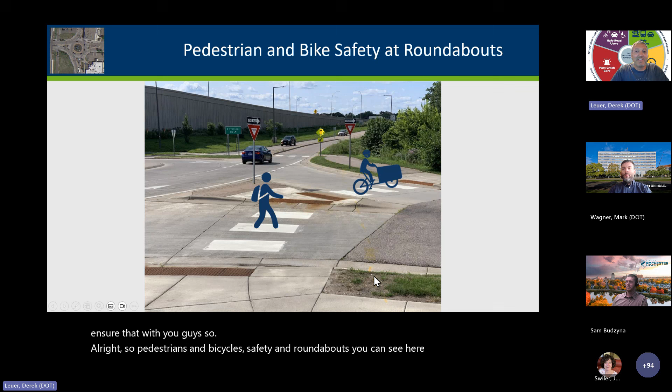So it is one of the bigger questions we get. We've looked at this a few different times in a few different ways, and I'm going to go over some of the results of what we found and share that with you guys. So, pedestrians and bicycle safety at roundabouts - you can see here we got a little cartoon going across the roundabout, and a bicyclist as well.

So just a little bit of history. This has been kind of a question that's been out there for a while. Without a significant number of roundabouts in locations where people walk, this was kind of a hard question to answer with crash data alone.

Back in 2012, there was a study conducted by the University of Minnesota that was purely observational. What they did was take what's called a fisheye camera and place it in the center of roundabouts at two different locations. They focused on how pedestrians and bicyclists are using the roundabout, and how drivers are yielding to those people as they walk into the roundabout and across those legs - are people yielding, are drivers slowing for those pedestrians.

The starting location of crossing affects driver yielding. That was one big finding - where that pedestrian was starting as the vehicle was approaching was really important. Another thing they found was that as vehicles exited the roundabout, those yielding rates were actually lower than when drivers were entering the roundabout.

But overall, what they found was there was actually really good compliance for drivers to pedestrians in roundabouts - probably much better than at typical through-stop intersections or even at signals sometimes. So what they found was fairly good compliance, and drivers entering the roundabout were actually tending to go fairly slow, especially compared to other intersection approach types.

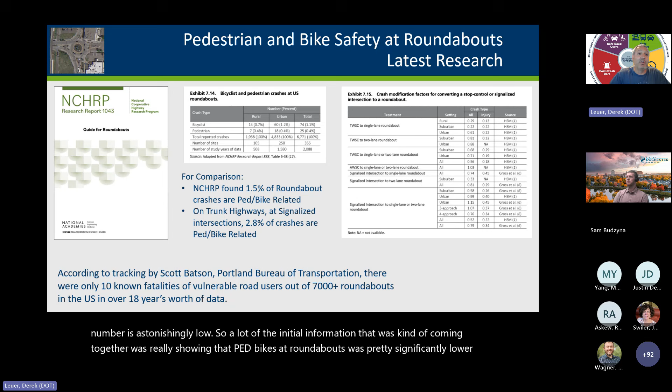We couldn't find any multi-vehicle fatal crashes. This report, though, really just looked at the vehicular crashes, because that's where we had the bulk of the data.

And we did look at the ped bike stuff, we just didn't really highlight it. I'll take a little blame here — I kind of fat-fingered a few of the numbers in there, and it didn't look real promising. But when we looked back and vetted that information a little bit more, it looked promising.

Shortly after that, we did an addendum where we looked at 100 more roundabouts, along with 100 control sites, and looked at pedestrian and bike crash rates and density alone. What we found, comparing those roundabouts to other traffic control types, was 64% lower crashes for pedestrians, both by density and by rate.

So it was a pretty substantial reduction. Bicyclists, we didn't see quite the same reduction, but we still saw a healthy one — between 10 and 20%. If you average it out, we had about a 16% reduction for bicyclists as well at roundabouts versus other traffic control types. So right off the bat, it looked really good.

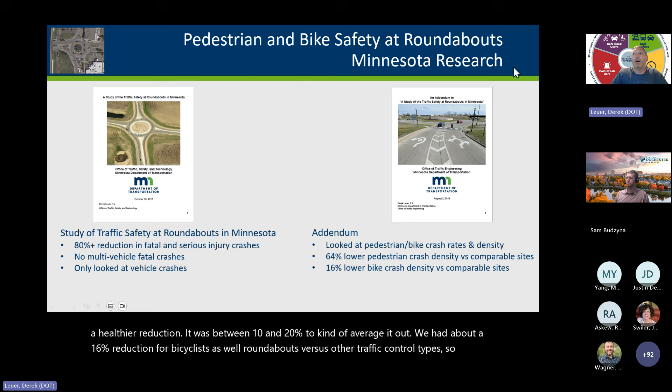Those numbers were very promising. We really try to boast those numbers — it's one of the first things we share when people ask how roundabouts compare to other traffic control types. Roundabouts work extraordinarily well for pedestrians and bicyclists.

We did another study in 2022 about user experiences at roundabouts, trying to gather more of that qualitative feel of how people feel about it, rather than just quantitative data. We looked at observational case studies across 8 different locations.

We really focused on that pedestrian user by measuring how drivers behave towards pedestrians, what pedestrian behavior looks like at the crossings, and what the pedestrian infrastructure leading up to and at roundabouts looks like, and how that impacts how people feel about it.

One of the things we found in that study was that RRFBs — rapid rectangular flashing beacons — at roundabouts do increase yielding rates. In-road signs work satisfactorily as well, though not as well as the RRFB.

Another big finding was that people walking much prefer single-lane roundabouts over multi-lane ones for crossing. That's probably somewhat intuitive — fewer lanes are easier to navigate than multi-lane roundabouts, which can be much more complex. This document also developed guidance for practitioners on things to consider when designing pedestrian facilities at roundabouts.

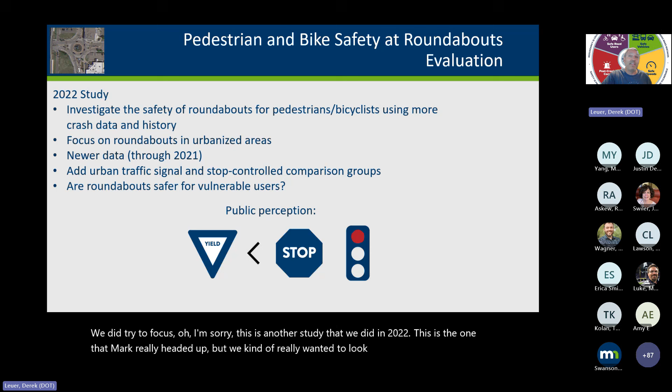The other thing about the 2022 study was to investigate the safety of roundabouts for pedestrians and bicyclists using more crash data and history, so we looked a little bit more at the crash data there. This is another study we did in 2022, the one that Mark really headed up. We wanted to look at more data for ped and bike at roundabouts, focusing on urbanized areas where we knew we'd have more pedestrians, and we were able to update the data as well.

The other thing we were able to do with this study is add specific traffic controls, such as signals and stop-controlled intersections, to see how those compare to each other. We really tried to get at the question: are roundabouts safer for vulnerable road users, those pedestrians and bicyclists, than those other traffic control types?

We tried to find all the roundabouts built before 2018, so we'd have a good, healthy after data set, and made sure the roundabouts were within incorporated city limits, so it truly was an urban area. We tried to use what's called adjacent land use context, using Florida DOT's context classification guide as a starting point. Minnesota wasn't that far along with their own guide, which we now have as part of our facilities design guide.

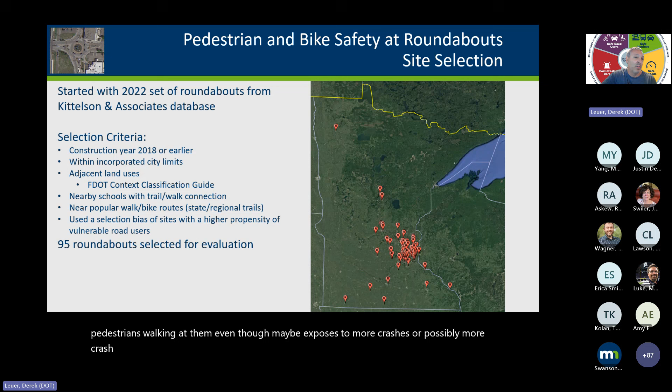We also tried to find roundabouts near schools with walking and trail connections, and sites near popular walking and biking routes. Quite honestly, we used a selection bias toward sites with a higher propensity of vulnerable road users, wanting to find sites more likely to have pedestrians walking. Even though that may expose us to more crashes or crash data, we wanted to emphasize sites most likely to have pedestrians and bicyclists using them. By the time we got through all this, we had about 95 sites for 95 roundabouts we could use for evaluation.

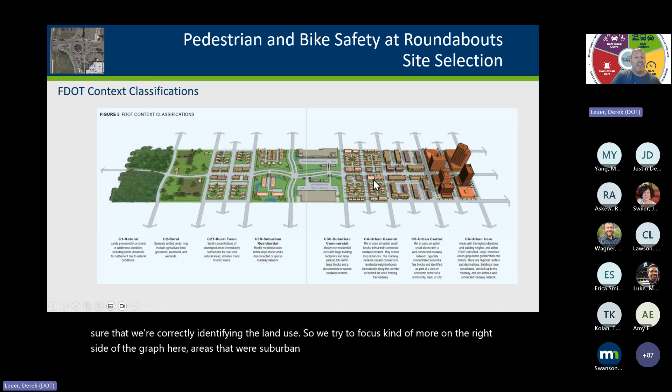Here's that context guide, if anyone's interested. Basically it's a way to make sure we're correctly identifying the land use. We focused more on the right side of the graph here, areas that were suburban, urban, developed, so we could really base it on sites where people are likely to be walking.

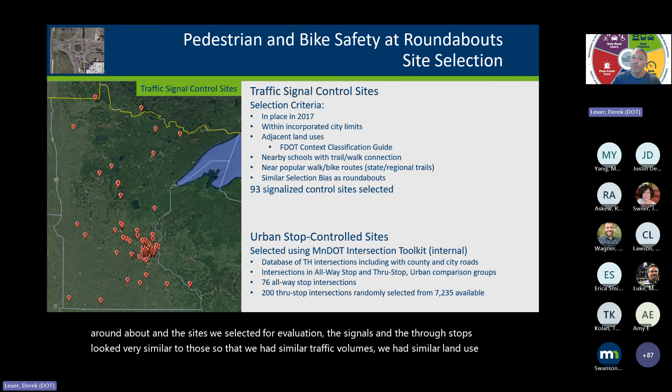For signals, we did the same thing, trying to pick signals with a similar flavor, more urbanized, more likely to have people walking, and similarly for urban stop-controlled intersections. We wanted to make sure the sites where we built a roundabout and the sites selected for evaluation, the signals and the through-stops, looked very similar, with similar traffic volumes and land use context, so we were really trying to compare everything equally.

We pulled crash data all the way back to 1998, wanting to get as much data as we could for that before situation. We looked at entering volumes, crashes both motorized and non-motorized, and tried to get as much site characteristic data as we could: construction year, number of circulating lanes, types of approach lanes, the previous traffic control type, and tried to figure out a way to measure what's called latent demand for vulnerable road users.

So, are these sites likely to have vulnerable road users based on other characteristics—that's known as latent demand. One of the sites we had to throw out after selecting it was one of the roundabouts near the casino at Mystic Lake. That site was removed mostly because data was a little bit lacking, but also because they had replaced it with a higher capacity system to get more people into the casino.

Here's an example of one of the sites we looked at: Minnehaha and Godfrey Parkway. This is actually probably one of the oldest roundabouts in Minnesota, and also probably one of the ones with the highest pedestrian and bike use. There are a lot of trails here—if you've ever been to Minnehaha Park in the summer, there are a lot of people walking and using the trails, enjoying the area, and frequently walking through this intersection.

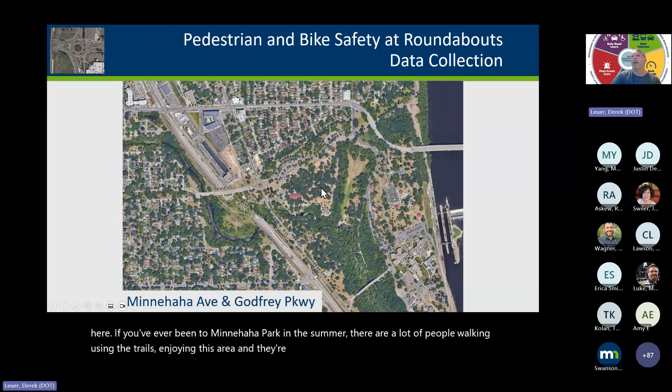Yep, roundabout, park, people walking, a lot of transit. The military or veteran center is pretty close to here as well, so there are a lot of people who either live or are staying at these facilities and they go use the park to walk around.

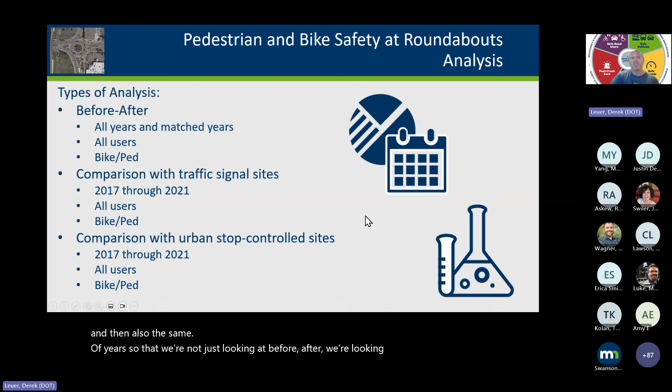So a lot of natural land. We looked at before and after, and we looked at a comparison with traffic signals, and a comparison with urban through stops. We tried to make sure we're comparing all those things equally, and using the same number of years, so we're not just looking at before and after. We're looking at sites that are roundabouts, sites that are signals, and sites that are through stops.

What we found was from before to after, we saw a pretty good reduction for pedestrians and bicyclists at those roundabout sites versus their before condition. Once again, we saw this 50 to 60% reduction across the board in injury type crashes. We did see a rise in property damage crashes. This is one of those flukes of crash data that's really hard to explain.

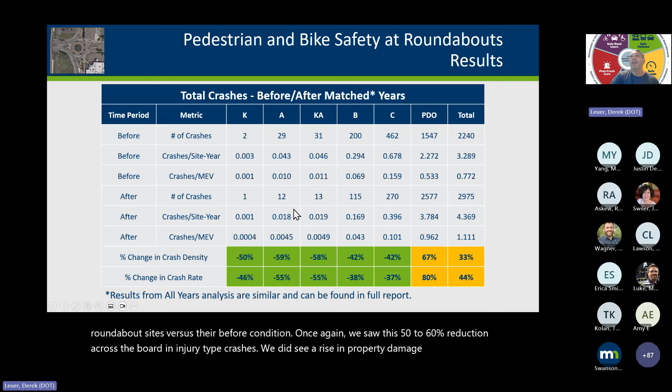Pedestrian data - this was just overall data. If we look at the ped bike data, it's a little bit more mixed, but for those Ks and As, we still saw that 40 to 50% reduction. For those less severe injuries, we saw not quite the same reduction. With the Ks and As, we're just kind of suffering from small numbers - we don't have a huge number to work with, but we did see a pretty good reduction overall.

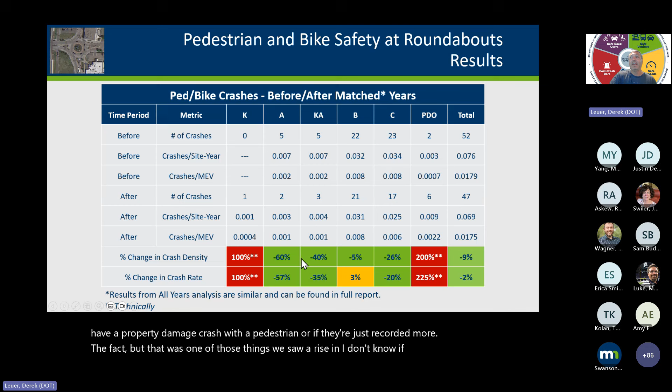Property damage crashes - this is where I was saying this is one of those flukes of crash data. I don't know how you necessarily have a property damage crash with a pedestrian, or if they're just recorded more after the fact, but that was one of those things we saw a rise in. I don't know if that's necessarily alarming, but really this 40% reduction in fatal and serious injury crashes is probably the number we want to focus on.

When we look at statistical significance of that before-after fatal and serious injury crashes, we did see a statistically significant reduction. It's kind of right on the value - we saw a change in the crash density that was significant. The change in the crash rate was not as significant. There could be a whole host of reasons for that, but then the other one we saw was injury crashes - we did see a statistically significant reduction in that. That was a p-value about as low as you're going to get, which is what you want.

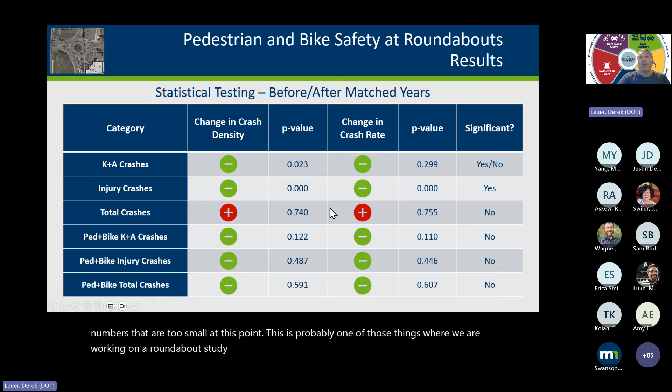But as far as the rest of the crashes, we were kind of bordering on statistical insignificance, which is a little frustrating. We did want to see statistical significance, but we did not see that with those ped bike KA crashes. Even though we saw a reduction, we're just working with numbers that are too small at this point. This is probably one of those things where we're working on a roundabout study update, and we're hoping that once we have more sites, more years, more data, we'll be able to flesh out that statistical significance.

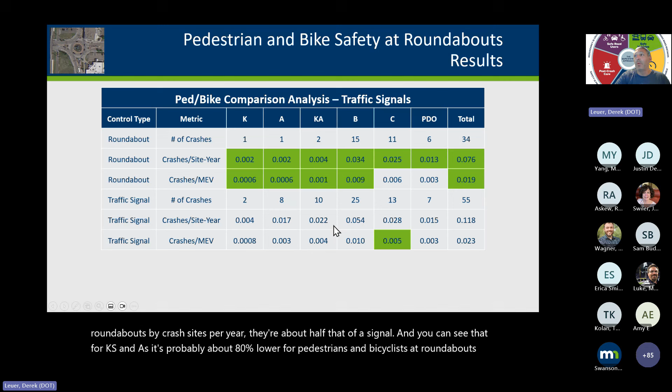Overall, compared to traffic signals, roundabouts are much lower. The way to read these charts, the spot that's highlighted green is the lowest number. If we look at roundabouts by crash sites per year, they're about half that of a signal. And you can see that for Ks and As, it's probably about 80% lower for pedestrians and bicyclists at roundabouts than at traffic signals. So once again, roundabouts are outperforming signals by not just a little bit, but by a lot.

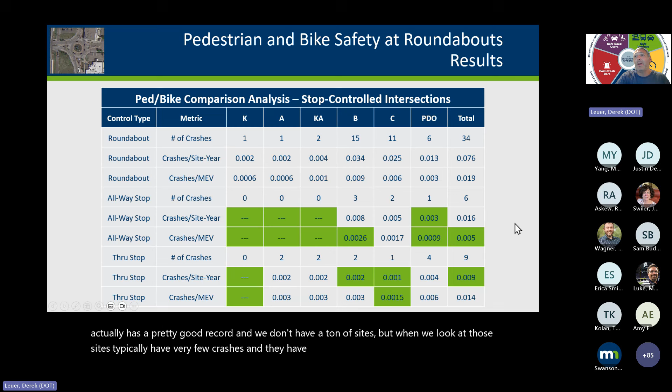Once again, we can kind of go through all these numbers. One thing that competed really well with roundabouts as far as ped bikes goes is actually the all-way stop. The all-way stop is probably one of the underappreciated traffic safety control types out there. It has a pretty good record, and we don't have a ton of sites, but when we look at those sites, they typically have very few crashes, and even fewer ped bike crashes. Even when we control for things like volume and density, all-way stops usually do pretty well.

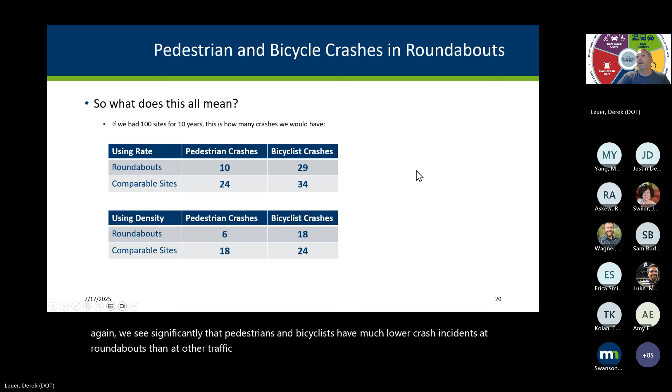Everything we've seen so far, all the crash data we've looked at time and time again, shows significantly that pedestrians and bicyclists have much lower crash incidence at roundabouts than at other traffic control types. That's what I just said. This was published in 2023. The roundabout study I just went through, Mark, who's going to talk next, was the chief author behind that one. And like I said, we're working on a big roundabout evaluation right now.

We're calling it our all-encompassing roundabout study for 2025. We're getting as much data as we can, and we're going to try to answer as many questions about roundabouts as possible with this study. Other things going on right now: there's an evaluation of roundabout crash rates, effectiveness, and driver education that the local road research board is starting up. And the MnDOT research office is also working on a study called Improving Safety for People Walking and Biking at Roundabouts.

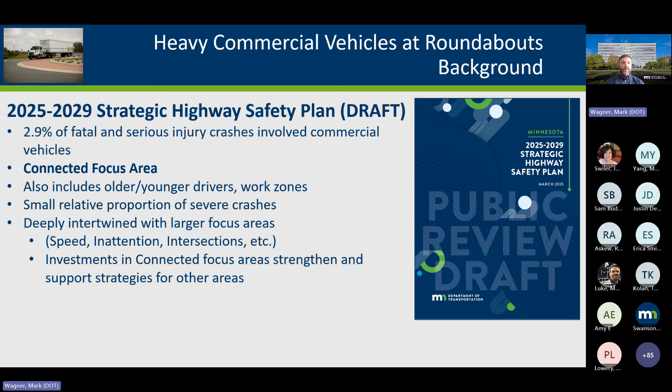But they are intertwined pretty well into those crashes. There's a good chance that a fatal crash involving a heavy commercial vehicle is also going to touch on speed, inattention, intersections, or roadway departure. So making the roadways safer for heavy commercial vehicles and preventing those severe crashes is also a good way to make progress on those bigger focus areas.

In the Strategic Highway Safety Plan, we've got these tactics and strategies. The strategy is the what — in this case, designing, planning, and maintaining roads for commercial vehicle safety. The tactic is how we're going to do that. Key tactics, marked with a blue key, are either very timely or especially important. In this case, roundabouts aren't listed in 2.1, but I think I'll show with this presentation that roundabouts are another great way to use roadway and geometric features to reduce severe crashes involving commercial vehicles.

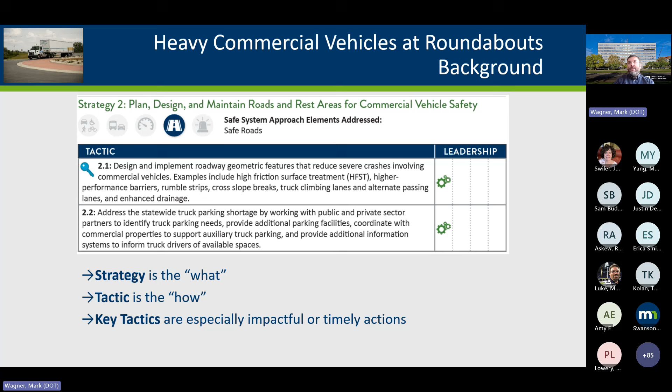So this evaluation was driven a lot by stakeholder concerns, especially in greater Minnesota. We would hear from our districts occasionally that stakeholders are very concerned about rollovers involving trucks at roundabouts. It's just that trucks have to go onto that apron, and that can cause load shifting, which was a big concern because that could cause the truck to roll over.

But then, since we were grabbing a bunch of sites and a bunch of crash data, we thought let's take a look at the overall safety as well, not just rollovers specifically. And then ultimately help address this question for the public of whether roundabouts really are safer for heavy commercial vehicles, and whether they are more prone to rollovers in roundabouts.

So I used TRID to look at some national research first, really looking at what influences rollovers at roundabouts. The three big categories that stood out were geometry, vehicle factors, and driver behavior.

Geometry factors include the slope of the road, the circulating roadway, the apron design, and whether it was single lane or multi-lane, all having an effect on rollover risk. A multi-lane circulating roadway allows a truck to use both lanes to navigate through instead of going onto the apron, so multi-lane roundabouts are great in that situation. Could single lane roundabouts be a contributor to rollovers? In some situations, it's possible.

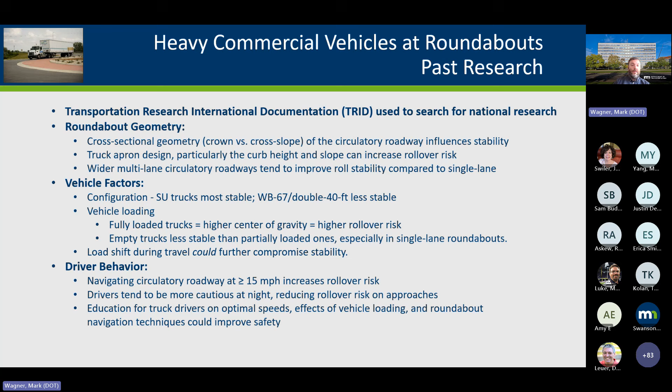And then driver behavior. Obvious things like if you go into the circulating roadway too fast, that increases your rollover risk. Education for optimal speeds through roundabouts, or the effects of loading, could also be a good way to address those rollovers in roundabouts.

This roundabout, we picked 107 for evaluation, fully operational by 2017, so we could get 5 good years of crash data to work with.

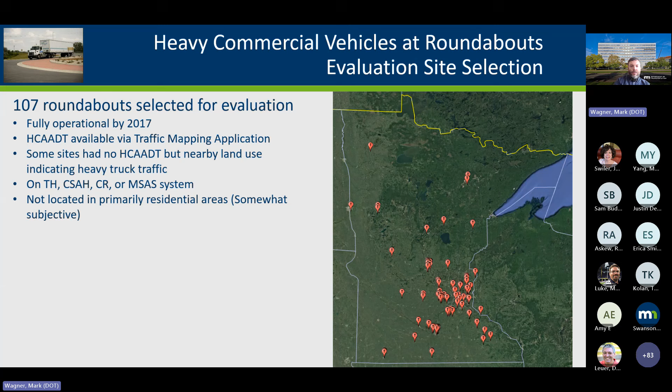We wanted sites that had recorded heavy commercial AADT, unless there was a specific land use nearby that indicated heavy truck traffic. So if there was no heavy commercial AADT for a roundabout, but there was a Walmart distribution center in the northwest quadrant or very close by, that's an indication there's going to be plenty of truck traffic through that intersection. We focused on bigger roadway systems like the trunk highways, the county systems, and the MSAS or Minnesota State Aid Street system, and then ones that were not located in primarily residential areas, since for obvious reasons trucks generally don't travel through areas like that.

Same thing with the signal control sites. We used a signal control comparison group because when you go to the public and talk about a roundabout, I think the next thing that comes up is, well, a signal would be better here because of the rollover risk and because truckers are more familiar with it, et cetera. So we wanted to see how roundabouts compare to signals as involving heavy commercial vehicles. Exact same criteria for selection here for the traffic signal sites as the roundabouts.

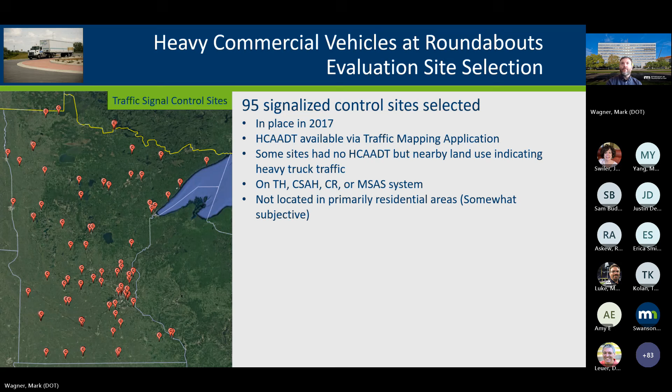The analysis here, we didn't do a before-after in this case, this was purely a comparison. So we grabbed 2017 through 2022 crash data. We looked at the crash rate both for all vehicles entering and then for those heavy vehicles entering the intersection, and we also looked at some of the most common characteristics in the crash reports associated with heavy commercial crashes.

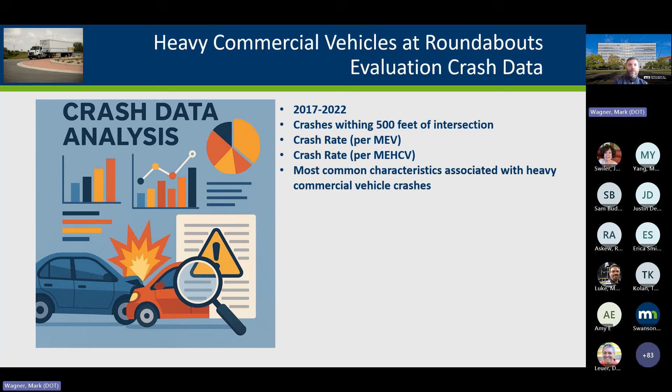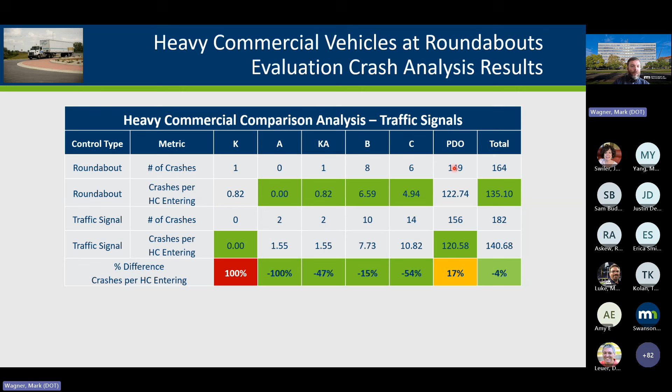I think a couple of the comparisons to look at here are these minor injury crashes. We did see a lot less of these relatively at roundabouts than at traffic signals, and the rates are lower there. I think it's kind of the same story for roundabouts - we tend to see less overall of these severe crashes, and start to see a shift to some of those lower injury crashes. Then PDO, surprisingly, more PDO crashes for semis at roundabouts. Who would have thought?

Sorry, I had a transition in there and forgot to delete it. So the other part of this analysis was, do heavy vehicle rollover crashes occur at roundabouts more often than signals? In the set of roundabouts we had, the short answer is yes. There were 15 rollovers at roundabout sites, which is about 10% of the heavy commercial vehicle crashes in the data set - a fatal, 3 minor injury crashes, and then 11 property damage crashes.

And only one of these were at traffic signal sites. So 1 compared to 15. That's a pretty stark comparison there.

The thing about these 15 rollovers, this fatal crash was later confirmed to be a medical event first. So it's not to say that if it was not a roundabout, it wouldn't have been fatal, but it's harder to say with certainty that the roundabout was what caused the fatal crash there.

About half of these 15 were at 2 of what I'll call our problem child sites. Highway 7 and County 10 down in Carver County is one of the older roundabouts on the trunk highway system. The curb design on the truck apron is a little different than what we use now. Same thing with this one down in Worthington - it's a heavy truck area, I think there's a food processing plant near there, and it's just got some of those older designs that contribute to rollovers.

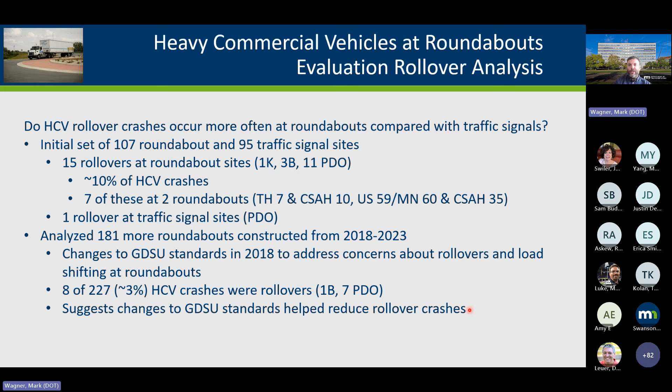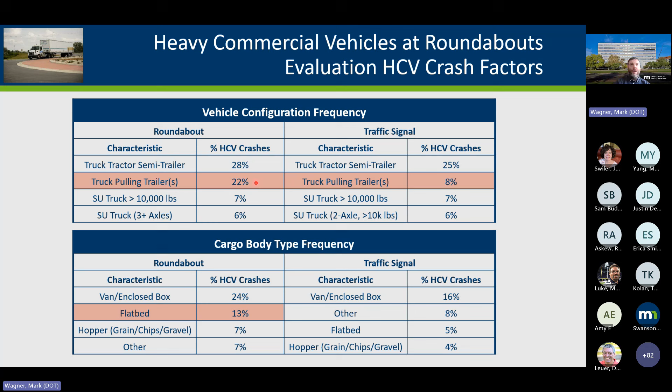In configuration, when we look at overall crashes, this is not just rollovers. Trucks pulling trailers had kind of a weird difference between roundabouts and signals. They were a lot more frequent in roundabouts. This could mean a work truck, like a landscaping crew pulling a trailer, someone pulling a boat, or someone pulling an RV. I don't know exactly what goes into this category for every situation, but it's interesting that at roundabouts these were more frequent crashes.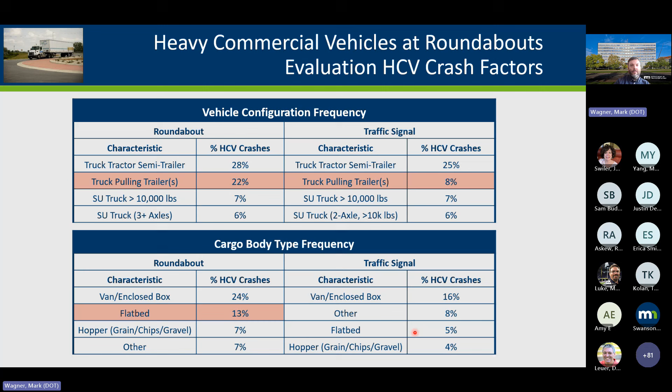Cargo body type, flatbed trucks, for some reason, were way more frequent at roundabouts. I don't know, probably just some kind of quirk of the data based on the sites we selected, but it did rise a lot higher than traffic signals in this evaluation.

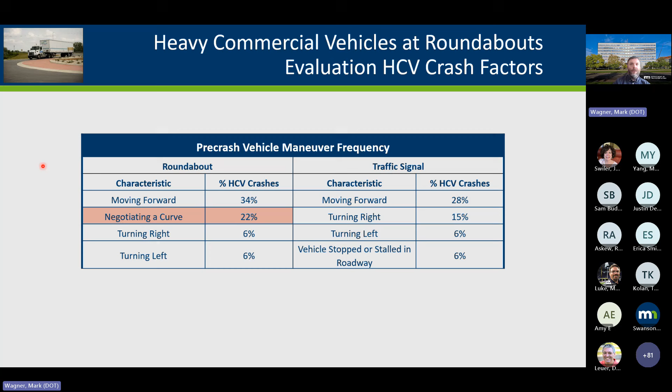Another funny one, based on how an officer would report this: the pre-crash vehicle maneuver at a roundabout was considered negotiating a curve. There's no curve at a roundabout really. These should really be in the turning left or turning right category, because that's really the movement you're making at a roundabout. But I think some of it is just that intuitive thought that if they're going around the center island, like this truck you see in the corner, some people still consider it negotiating a curve in a way.

So overall, what could we draw from this evaluation? Just based on the limited numbers we have, fatal and serious injury crashes at roundabouts show about a 50% reduction, or 50% fewer, compared to signals. And that's just based on this study. We had those lower rates at roundabouts for the minor and suspected injury, the B and C crashes.

I think we answered in a way the question of whether those rollovers are more frequent. They were, based on older design standards. But now that GDSU has changed some of those standards, we've really seen that rollover effect kind of go away. It's down to 3%, compared to about 1% for commercial vehicle crashes at signals. So 1% at signals versus 3% at roundabouts, those are very close percentages now. That effect is kind of disappearing as we put in more roundabouts with newer design standards.

I think some of those findings I pointed out in the previous charts really just indicate that we need to do a little more effort in making sure officers, or whoever's reporting the crash, are really clear about what goes into each category, making sure those details and that guidance is clear.

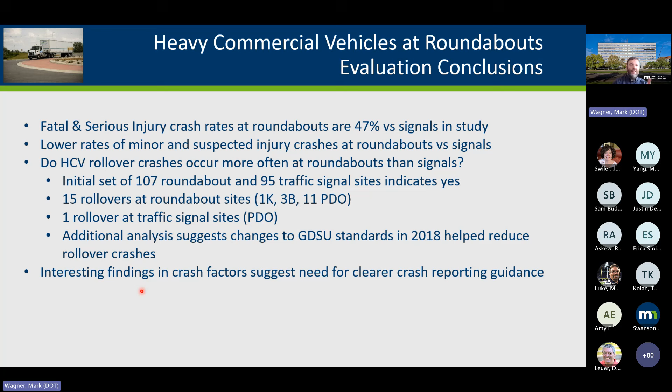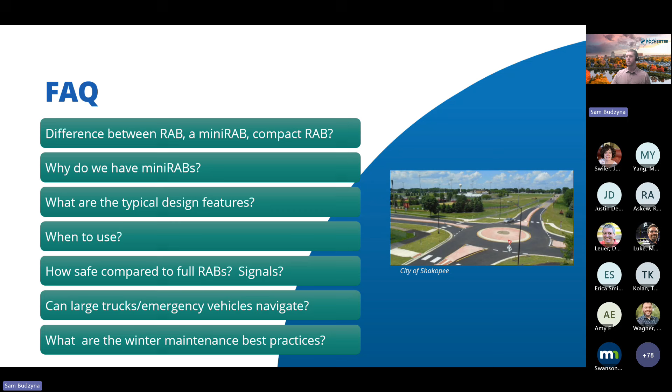These are the questions. I'm not going to stay on this slide too long because we're going to go through the questions.

So first off, what is the difference between a mini roundabout and a standard roundabout and a compact? Just this week I was emailing somebody and they called it a compact, and I was like, hold on, I thought we were talking about a mini roundabout. But the biggest difference is that the central and splitter islands are going to be all traversable. With a compact roundabout, they're a little bit bigger, maybe you could call it a medium-sized roundabout, but they don't always have traversable splitter islands. They're still going to have the traversable central island. Some of the larger compacts might even have something small in the center that's not traversable, but it's going to be mostly traversable island, which is very similar—basically a big truck apron, like you'd have on your standard single lane roundabouts. But those are the differences: mini roundabouts are smaller and fully traversable, compact is a little bigger and a little less traversable.

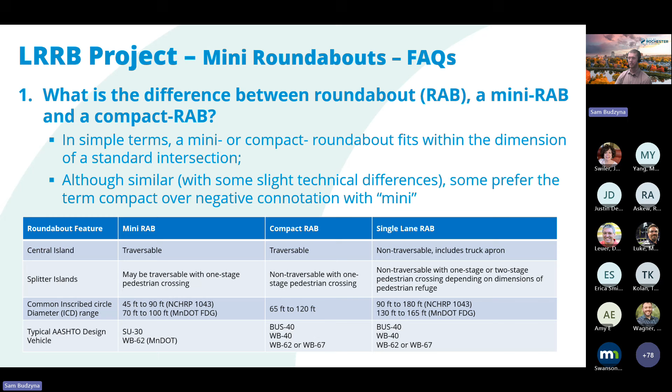So why would you even want a mini roundabout? Basically, they're a lot smaller, and they're really good at handling low volumes of traffic. I really like them as alternatives to all-way stops—I'd much rather see a mini roundabout than an all-way stop, especially in some of our local neighborhoods. They're also great traffic calming devices. The new MUTCD, which Minnesota is getting ready to adopt its own version of, very explicitly states stop signs shall not be used as traffic calming devices. Mini roundabouts are really good at traffic calming.

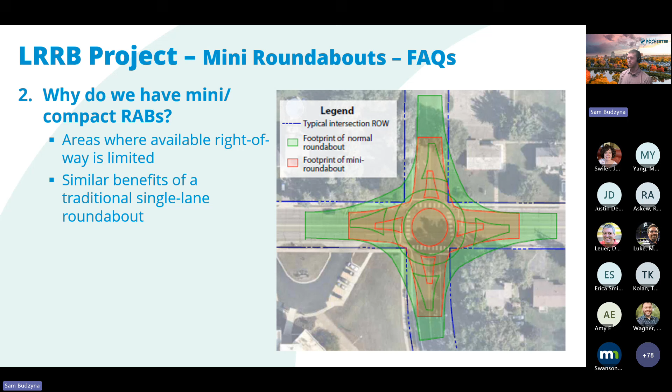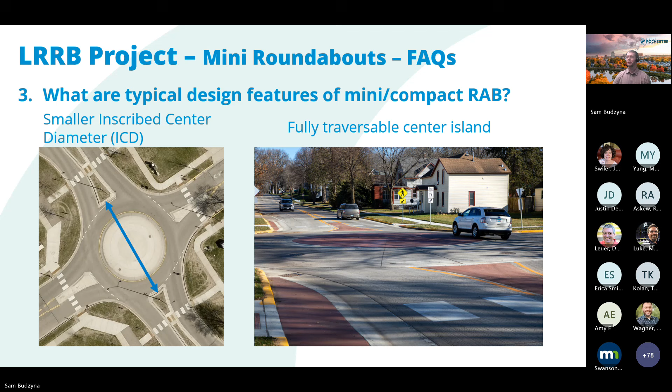Typical design features: like I said, they are smaller and traversable, with no signs in the center island—if you put a sign there, then it's not traversable anymore, so you really got more of a compact. They do tend to have a single stage pedestrian crossing, which is another big difference. You can have smaller splitter islands that aren't always wide enough to technically be a pedestrian refuge. Plus they're traversable, so if you model your truck turning movements and they need to traverse over the pedestrian crossing area, that can be okay, but you should really make sure you're designing it as a single stage pedestrian crossing so people aren't standing there while large vehicles are navigating through. But in that situation, vehicles should be yielding anyway because it is a marked crosswalk.

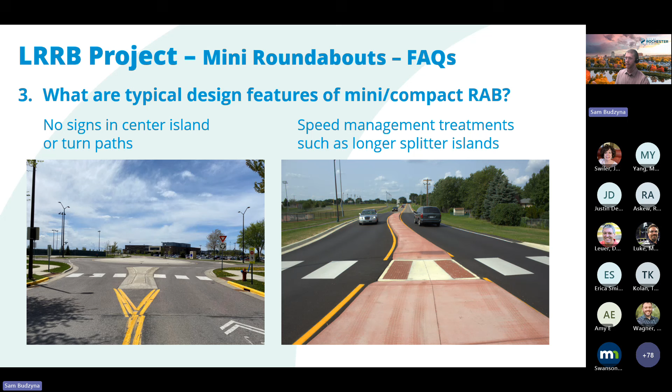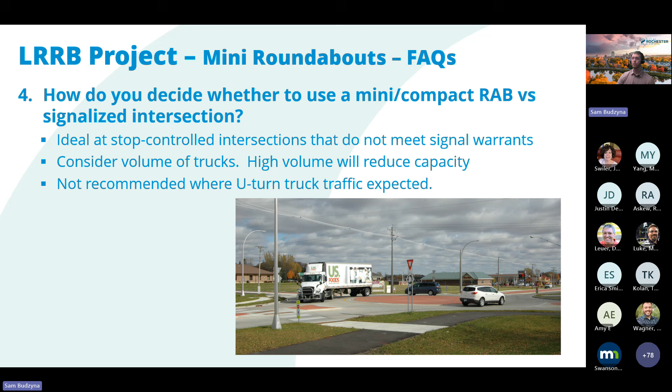So how do you decide what type of roundabout to pick? Again, these are great alternatives to all-way stops. If you meet signal warrants and you have more space, then a standard roundabout might be better. Obviously, these are not going to be big enough if you have a lot of large vehicles, especially where they're making U-turns.

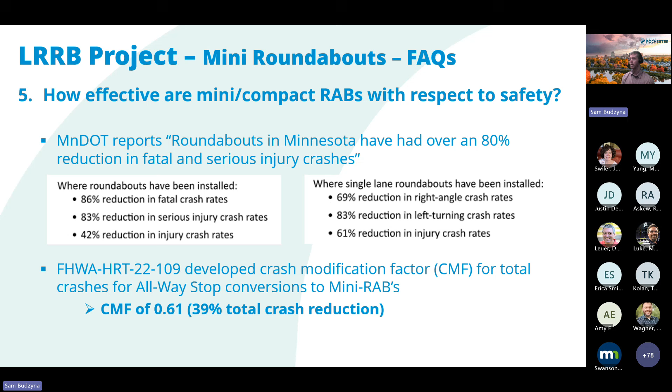With respect to safety, Derek and Mark both talked about this a little bit, but they are significantly more safe than all-way stops. MnDOT has a report that Derek talked about a little bit—I don't think they specifically talk about mini roundabouts in there, it's more just roundabouts in general. But FHWA does specifically talk about mini roundabouts: 39% total crash reduction, which is pretty significant.

How do you accommodate those large trucks and farming equipment? They can drive right over the top—like I said, it's basically a truck apron. That is one of the complaints I've gotten a lot here in town: oh, people are just driving right over the middle. Well, it's designed to be driven over. You could actually just paint the center island, it doesn't have to be raised at all. In my experience, I like a 3-inch central island and 4-inch splitter islands to really discourage drivers from driving over the center if they don't have to. A truck could still easily do that, but you really want to encourage smaller cars to stay around the circulatory part of the roadway. And again, don't place signs in the middle because you need that space for turning movements.

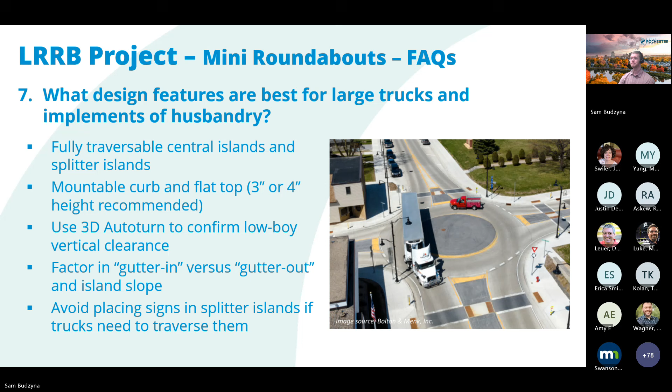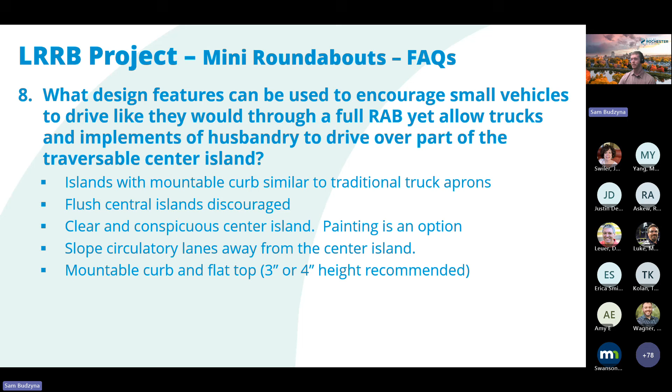As far as how do you encourage those small vehicles to drive around like they would at a full-size roundabout, again, you really want to get that island raised up. That's going to provide your most traffic calming benefits as well.

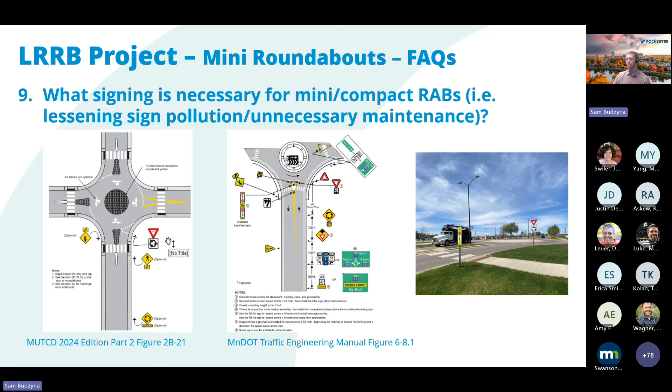So, lessons learned. This being on this TAP, I'll say this is one of the more active TAPs I've been a part of. Lots of representation from MnDOT, counties, cities, and all those different perspectives. As we answered these questions as a group, everybody had their own opinions, and it was a really good conversation to be part of.

A lot of these questions are very context dependent. My lesson learned from being part of that conversation is if you're building one of these in a residential neighborhood, I probably wouldn't just copy one that MnDOT built on their trunk highway system. I'd make it a little more context appropriate, but do what you can to slow speeds. Try to introduce some curvature if you can. The smaller you can get them, the more appropriate for those local residential streets.

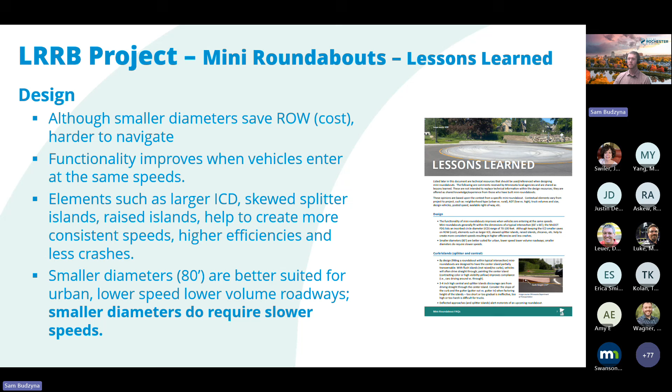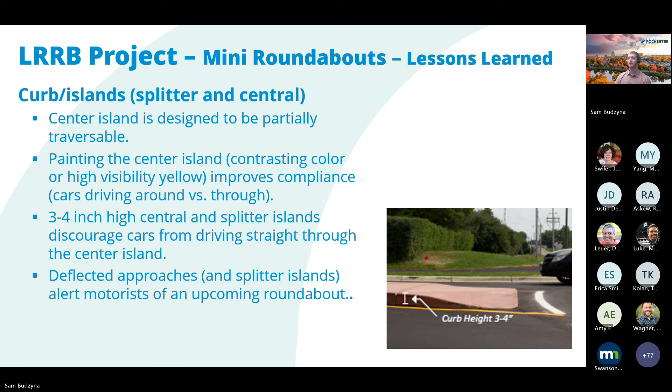And about curb height, it's okay to just paint a yellow circle out there. You just don't get as much of the traffic calming benefit from that. People can just fly through. That's one of the questions I get asked a lot: can you just drive straight through? Well, yes you can, but the ones we have have raised central islands, so you can do it, but it's pretty bumpy. You can go full speed over any speed hump too, but you're going to feel it. If you want to do it just as a pilot project, feel free to paint it and then decide if you want to invest in something more expensive.

Again, with signs, those in-street pedestrian crossing paddles are great to put in a standard roundabout in the splitter island. You really need to check your turning movements before you put one in a mini roundabout, because as soon as you put that sign up, it becomes a compact roundabout. You don't have a traversable splitter island anymore. So you really want to think about that before you start putting signs up.

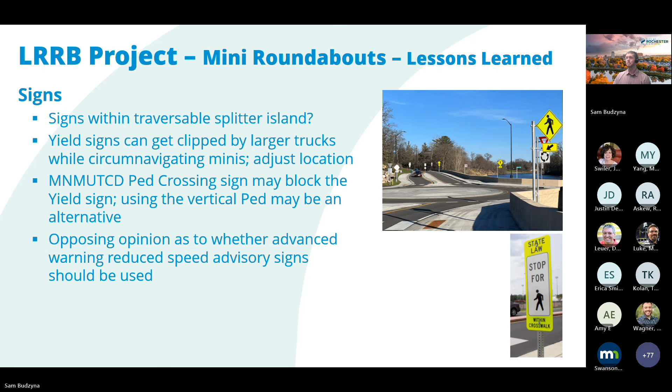And then education outreach—they are different than a standard roundabout, and it is okay to drive over the central island. That's one of the biggest complaints we get: people are driving over the central island. I just have to remind people that's not illegal, it's designed to be driven over, it's perfectly fine. But you want to try to get into your design, encouraging people to go around the circle.

And then in the report, there's also a section about winter maintenance. I remember that first one here in Rochester—I was new to the city, and our maintenance manager at the time was pretty upset that we had just built this thing. I thought he was going to flip over a table. He was like, 'How are we supposed to plow this?'

Anyways, there's a lesson learned in here about typically what people have been doing: just plow the circulatory roadway. The middle part is basically just a truck apron, and those larger vehicles can make it through a couple inches of snow. If you get a significant snowfall, or several smaller ones back to back, you might want to eventually come back and plow out the central circle, but it's probably okay to leave it most of the time. And there's more resources in there.

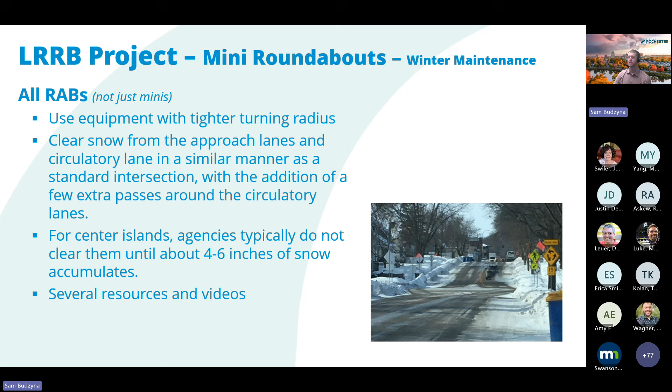Again, more design guidance—the NCHRP reports are great, as well as the MnDOT facility design guide. There's some general stuff in there and some videos. And again, our database that is in the report lists the latitude and longitude if you want to look that up on Google Maps.